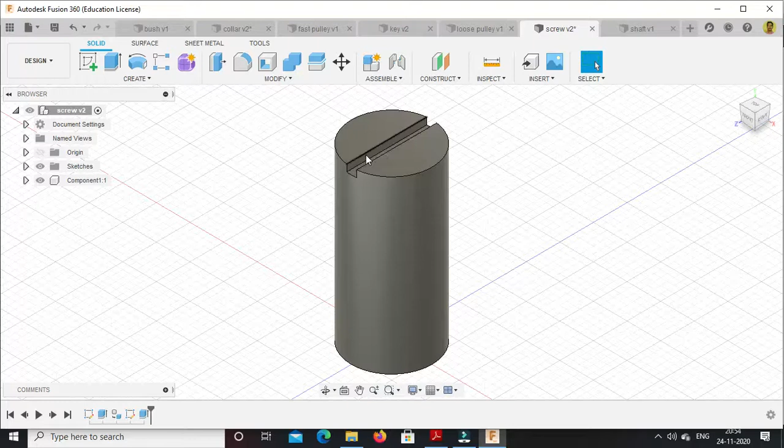Now I have made one more change for the collar screw. Whatever pin we were providing, I have cut one recess just like a set screw. For tightening purpose, I have drawn one rectangle and using the extrude cut option I have provided this cut.

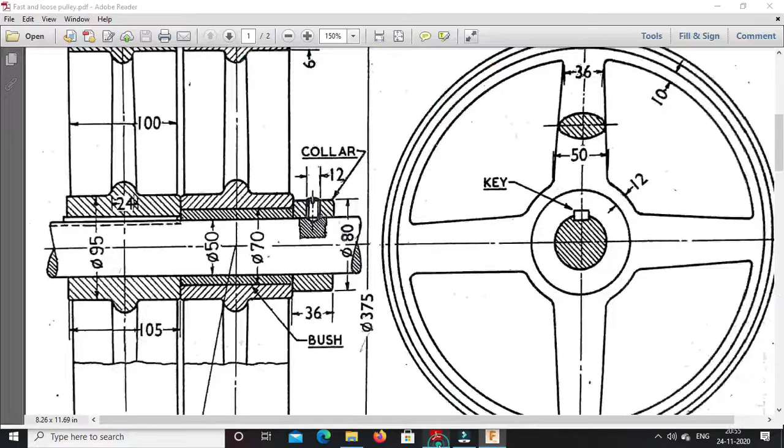Now we will provide a thread to it. For tightening purpose, in the earlier video I discussed that we would keep it as it is, but we will go as per the drawing. This screw is given as a threaded one, so we will provide threads to the screw. It is simple: just go here, create option, then go to the thread option, then select this face for which we want to provide a thread.

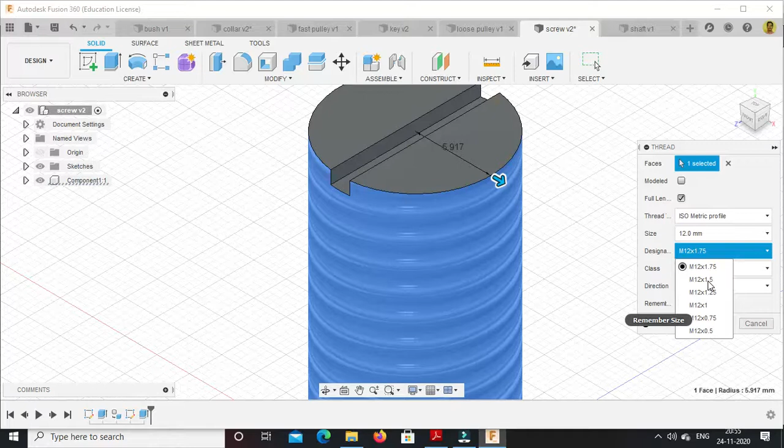ISO metric profile is there by default. If you want you can change it, but standard profile is ISO metric, so we will keep it as it is. We will select M12 and 1.5, where 12 is the diameter of the pin and 1.5 is the pitch. We will select M12 into 1.5 and also right hand thread, keep it as it is, and press OK. So this is nothing but the threading.

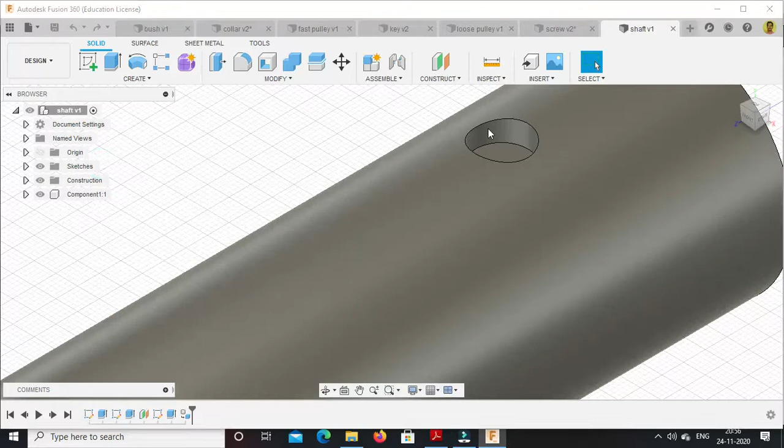Similar internal threading we will provide on the shaft. We have already cut this hole on the shaft, so we will provide internal threading to it. Just go to the thread option, select this internal part, and same as we provided on the screw: ISO metric profile and M12 into 1.5 is the pitch. Press OK.

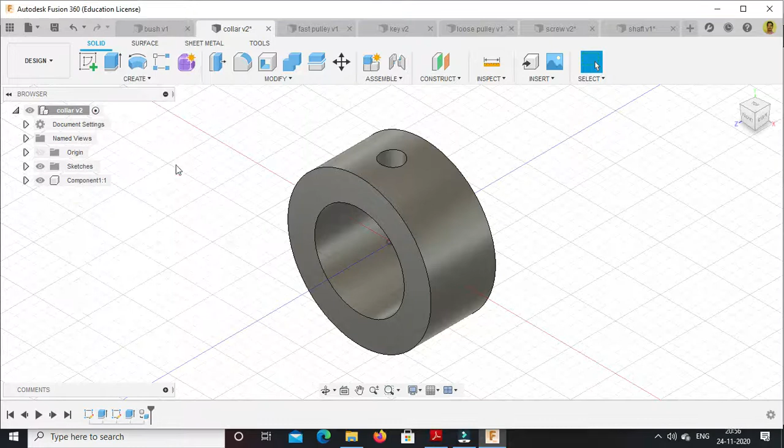Similarly for the collar also, because the screw is going to fit inside the collar and shaft, we will provide a thread, internal thread, to this collar also. M12 into 1.5. Press OK.

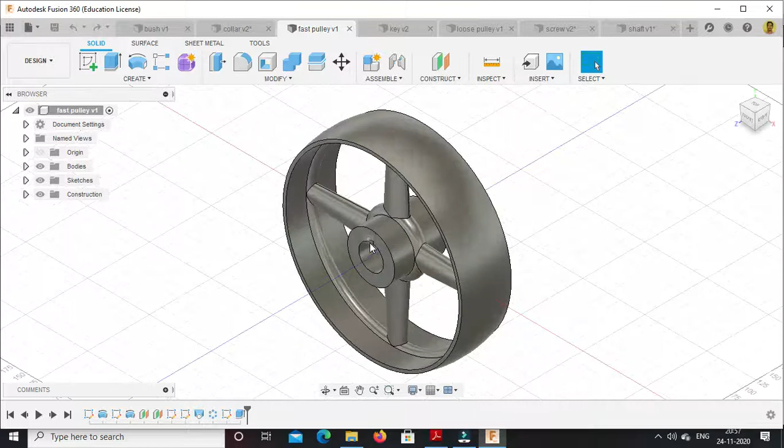So now these are all the parts that we have prepared on the Fusion 360 software for the fast and loose pulley. This is the shaft on which all the other components are going to mount. Then this fast pulley which is having a key, then this loose pulley, which has no keyway, only internal diameter of 70. Then the bush, then the collar, then this is the key, and this is the screw.

Now we will assemble all these components together. If you observe, this is the sectional view given for the assembly. This is the shaft over which the fast pulley will be. The left side pulley is the fast pulley because it is fitted to this shaft with the key, so it is called a fast pulley.

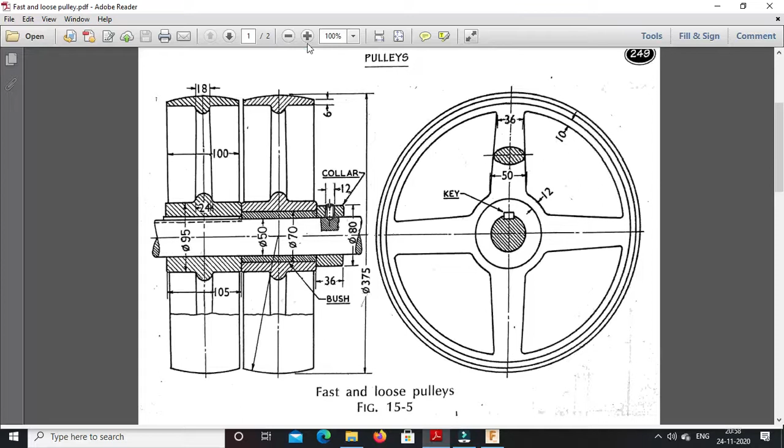So the shaft is there, to this shaft the key is attached, then with the help of that key the fast pulley is attached. The central portion which has dense hatching is the bush, fitted over that shaft. Now over that bush this loose pulley is there, so this second right side pulley is called the loose pulley. Then finally, to keep the loose pulley at its position, the collar is fitted, and to prevent the collar from axial movement along the length of the shaft, this screw is fitted commonly through the threading provided in the collar and shaft.

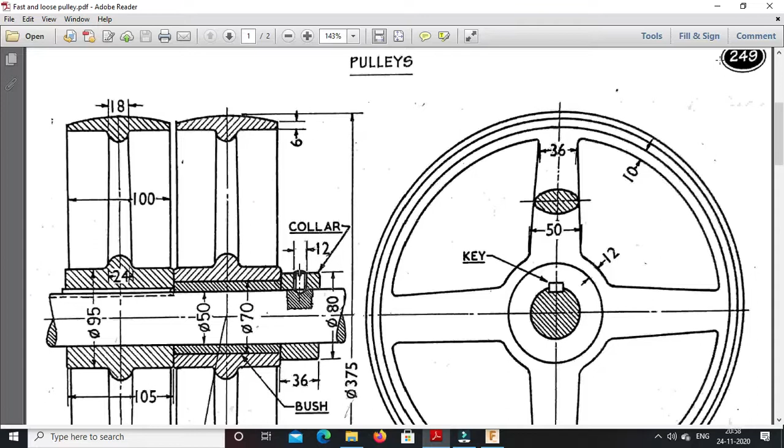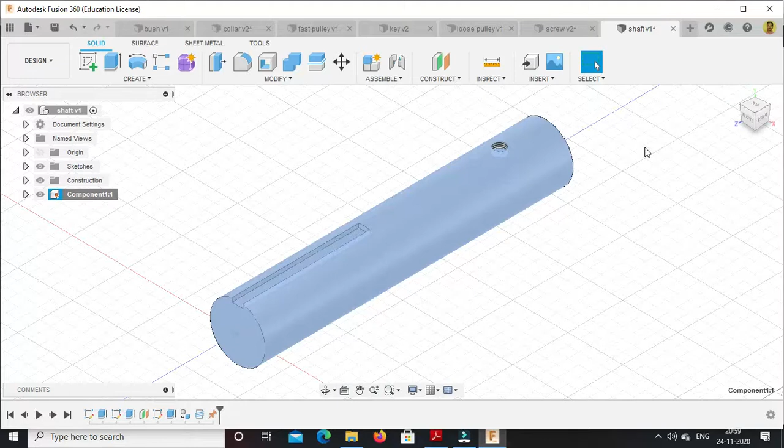So we will start with the assembly. As all the parts are mounted on the shaft, we will start the assembly with the help of the shaft. So this is a component; already I have converted all the bodies into components as per our requirement for the assembly purpose. Now first of all we will fix this, or make it ground, so it will not be able to move. So this shaft is now immovable.

Now we will fix first of all the key. Just go to the data panel. Key is there, just select this option, insert into current design.

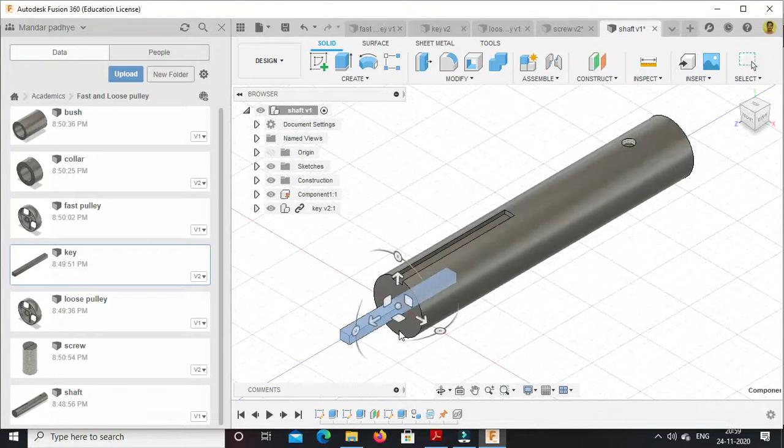It will take some time to load that key. Okay, we will drag it outside, press OK.

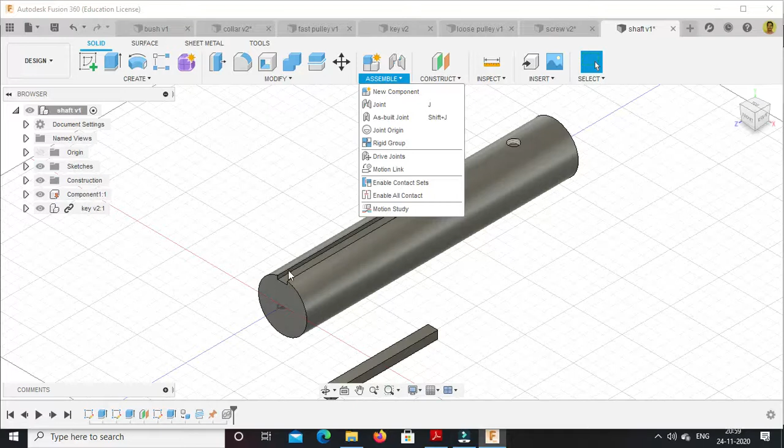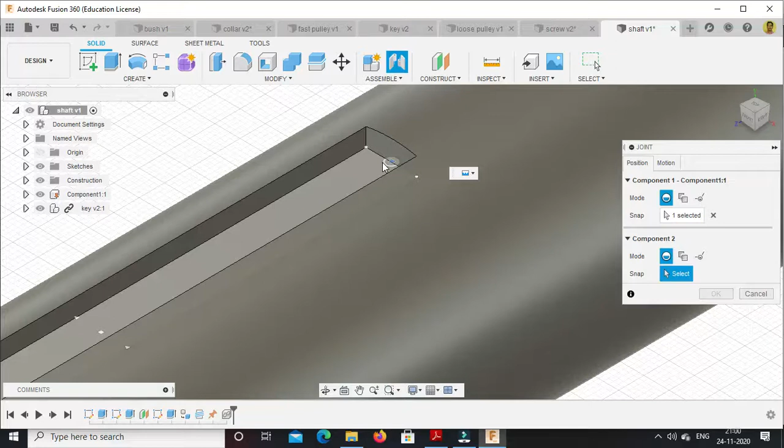Now we want to place this key over this keyway provided on the shaft. For that, go to the joint command. The bottom face of this key should be in contact with the bottom face of the keyway. Select this bottom face with its center, the circular portion, then select the same on the keyway—this is the bottom face—along with this end point. The key will get fitted, press OK.

As per our length, the keyway was 115 and the length of the key is 110, so that's why this 5mm is remaining. It is as per the expectation.

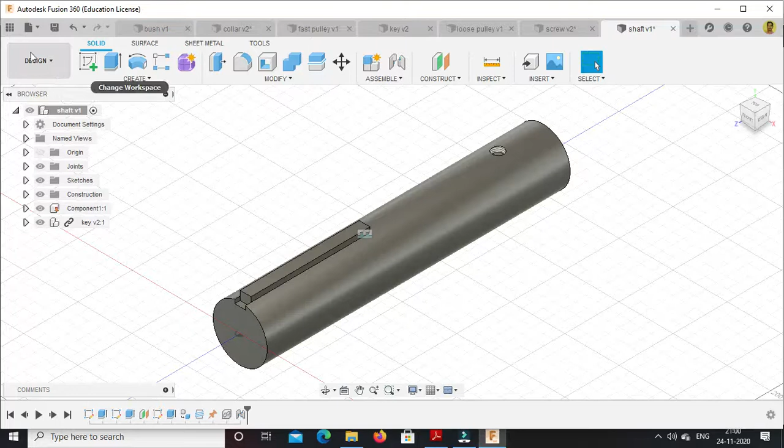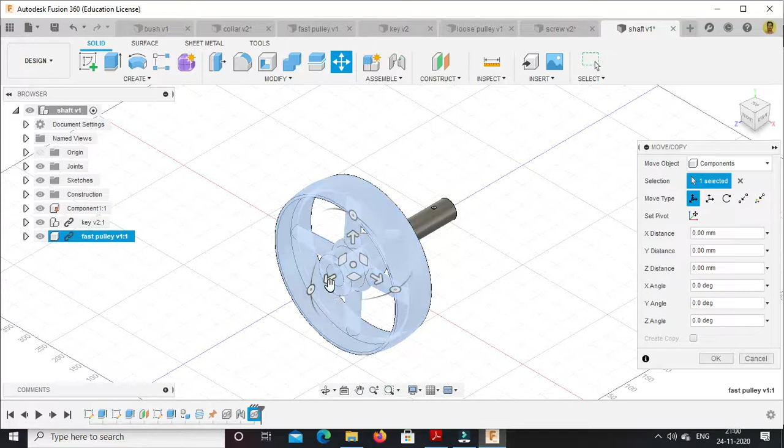Now we will fix the fast pulley. Go to the data panel again, pick up the fast pulley, insert into current design. Close this data panel, drag it further, press OK.

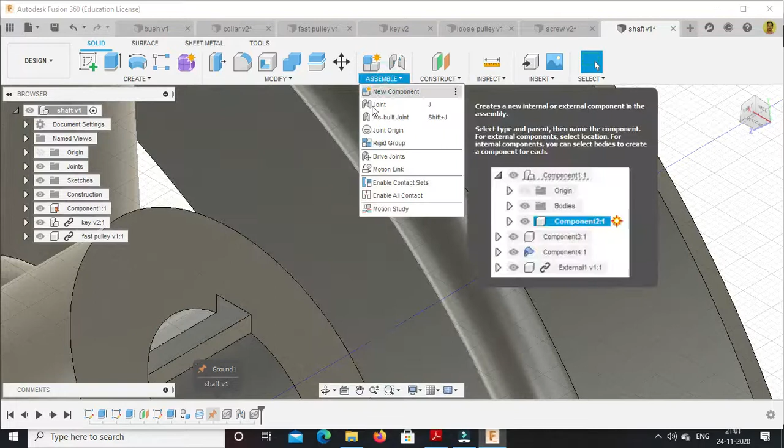Now with the help of this key we will fix this fast pulley on the shaft. We will select the keyway inside the fast pulley for the joint purpose. Go to assemble, use the joint option, select this keyway—this is the face of the keyway, along with this center point. So this circle is important.

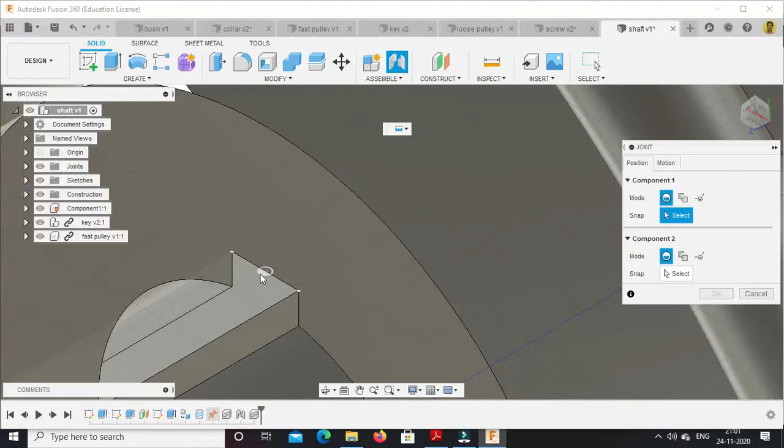Keep in mind that whenever we provide the joint command, this circle which is appearing near the arrow is very important, because the joint will take place with that point. If you select without it, it will not be appropriate. Select this point, then select the same on this key with its end point—again the circle is important.

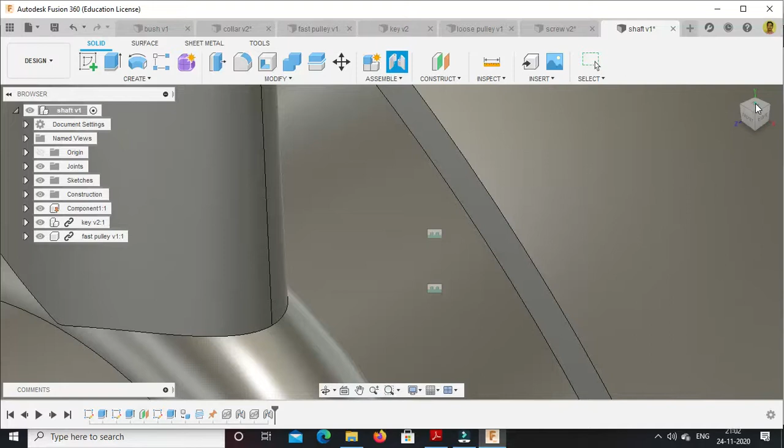Motion should be rigid because we don't want to move the fast pulley. Press OK. If you observe, this fast pulley is exactly fitted.

Now, next: we want to fit the loose pulley, but it will not fit directly on the shaft, so we want to first insert a bush on the shaft. Go to the data panel again, bring that bush into the current design, insert into current design.

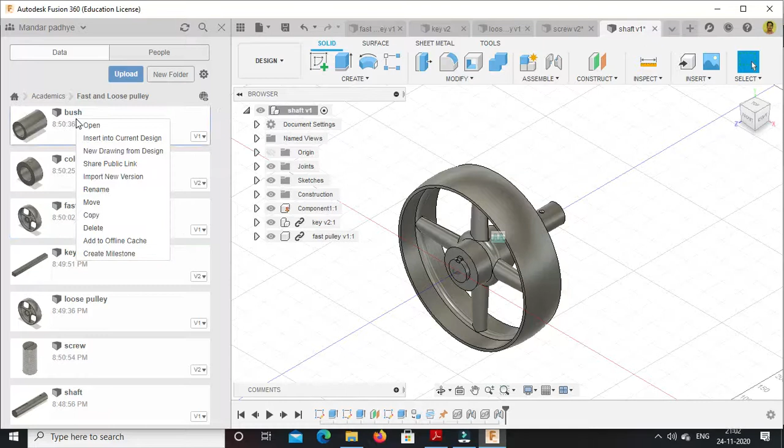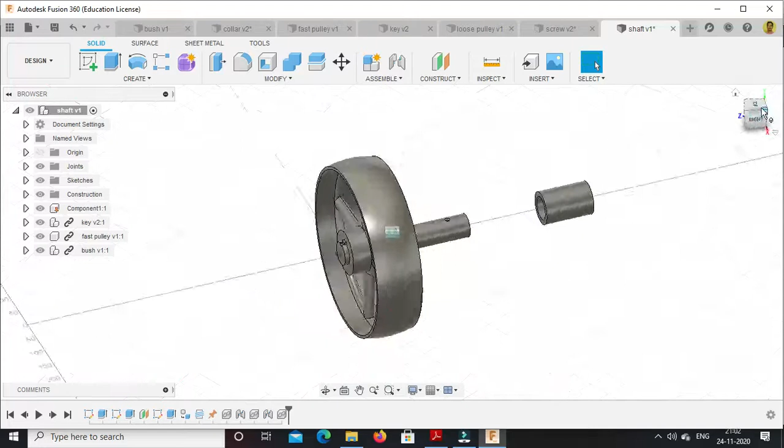We'll bring it backward, you can drag it anywhere. Press OK. Now we want to fix this bush on the shaft.

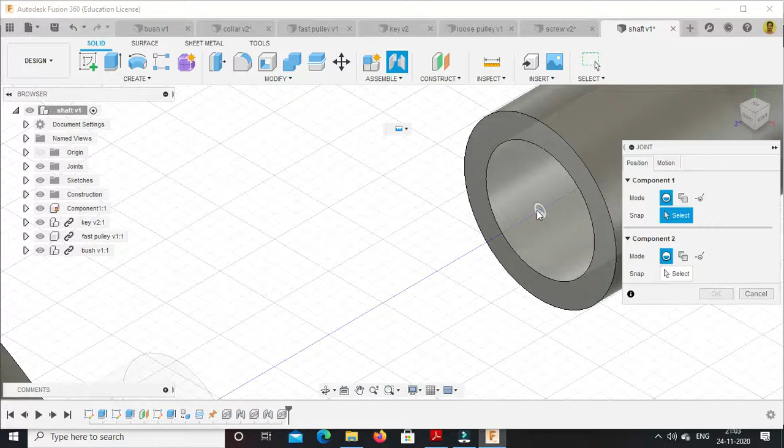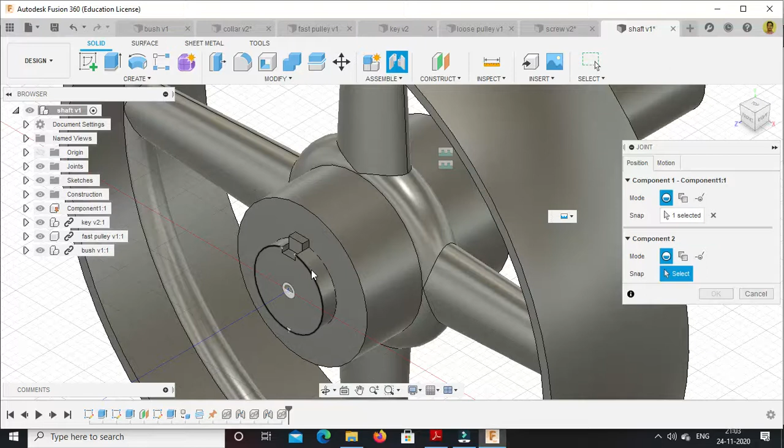For that purpose we will select this internal cylindrical surface. Go to the joint command, select this internal cylindrical surface along with this end point. The same thing we are going to select on the shaft. But now we will select this—press Ctrl for selecting the center. We have selected the left end point of the shaft, but we don't want to fix the bush over here.

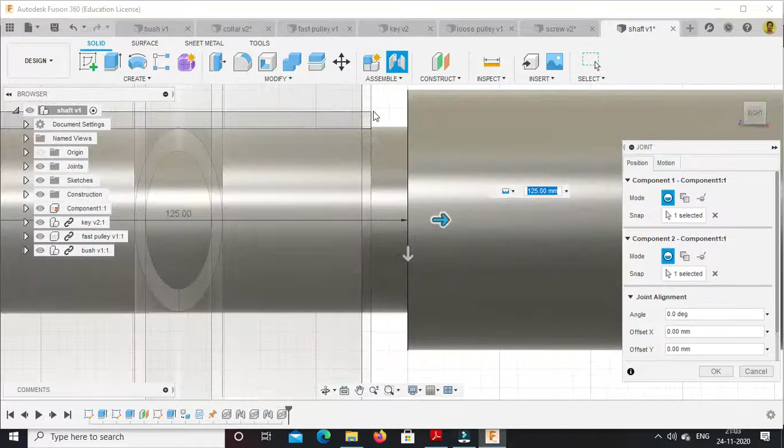So we will provide the offset. For that purpose, just drag this—this bush should get fitted or be in touch with the fast pulley. This distance is 115, if you remember the length of the keyway, so we will enter the distance as 115.

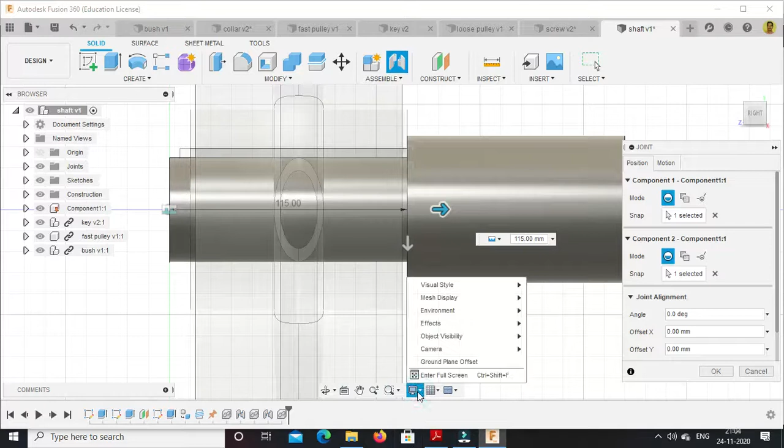You can check it using the visual style as wireframe. Now it is correct, so press OK. Again we will make the visual style wireframe with visible edges only.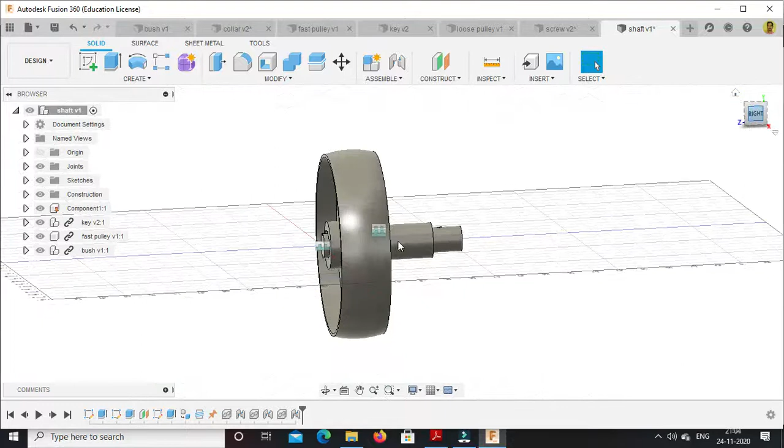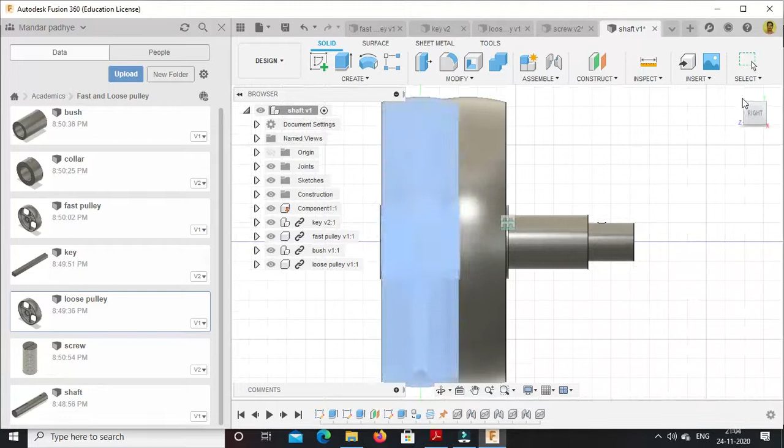Now we will fix the loose pulley on this bush. Select the loose pulley, insert into current design. Drag it as per the requirement—we will drag it to the back side. Press OK.

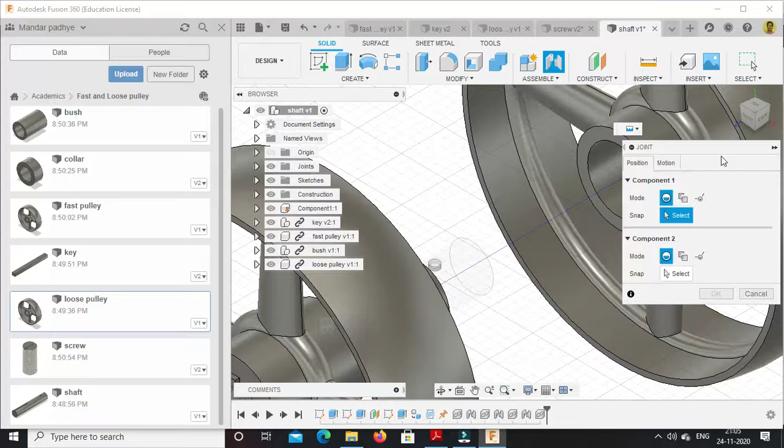Now we want to fix this loose pulley on the bush. Go to the joint command again. We will select this circular, inner circular portion of the bush. Again we will go to the joint command, press Ctrl for selecting the circle or center of the circle.

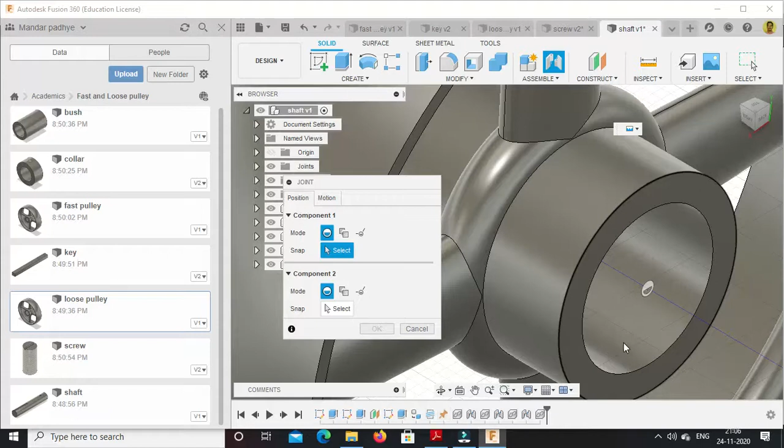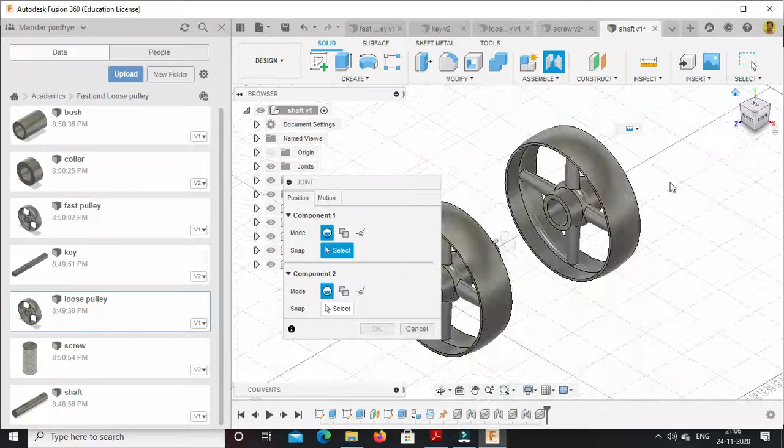I am not able to select it. Software is showing some problem. I will try to select that. I will cancel it. Again go to joint command. Okay, now I am able to select.

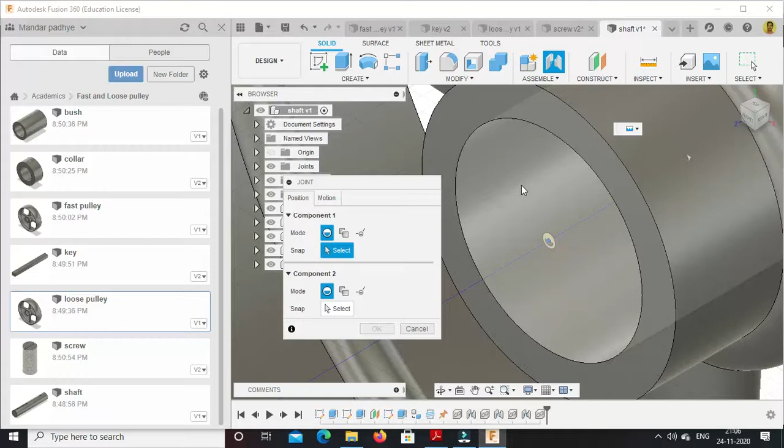Select this inner circular face with the front center. Now select the second point, so just select it on the bush. Okay, so this is the bush along with its center point, which is at the start of the bush.

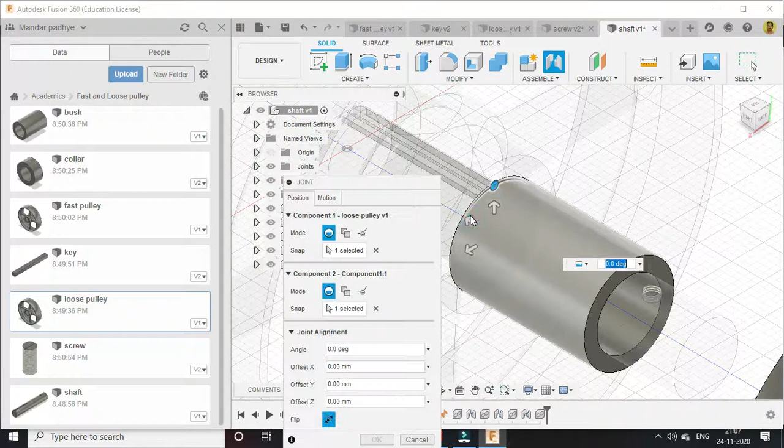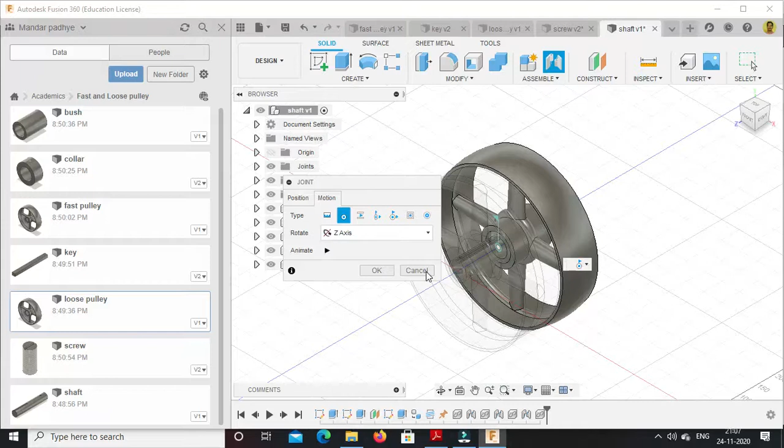Now we want this loose pulley to be able to rotate along with the bush, so it should be able to rotate. For that purpose we will select the motion type as revolute, so the pulley should be able to rotate freely over that bush. The rotation axis by default is the Z axis, so keep it as it is because we want to rotate that loose pulley along the same axis only. Press OK.

Now the next component that we want to assemble is the collar. Again go to data panel, select the collar, insert into current design, select this option.

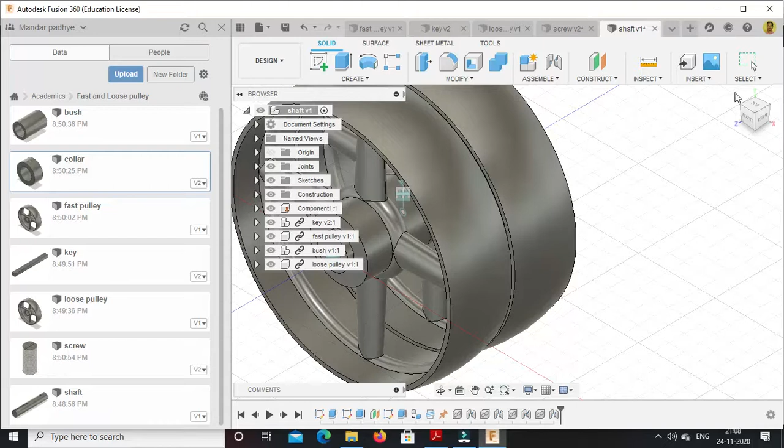Again we will drag it on the back side, press OK. Now this drilled hole should exactly match with the similarly drilled hole on the shaft.

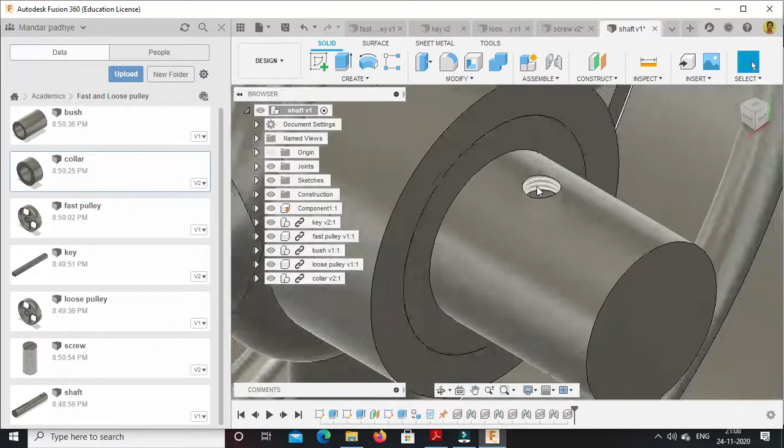So for assembly purpose we will make use of it. Assemble, again go to joint command. So this collar...

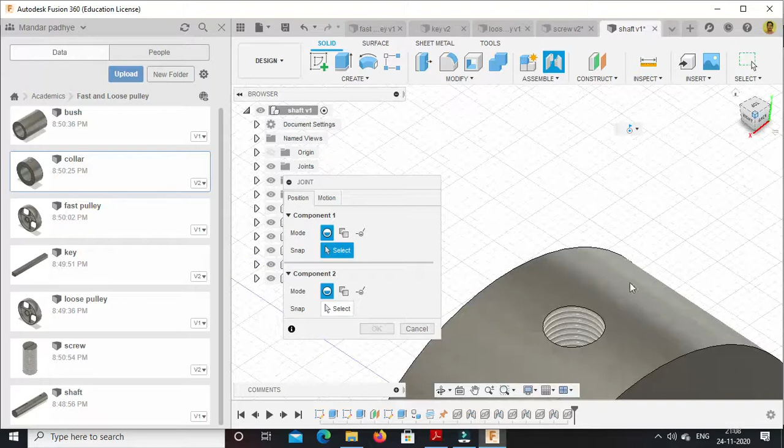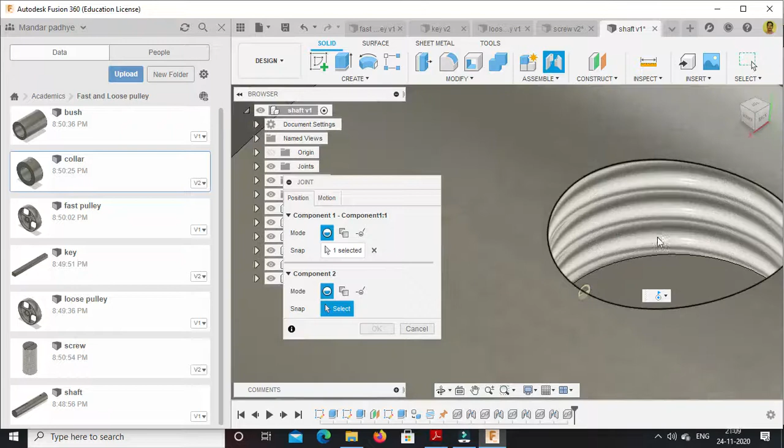Will select the bottom center of the hole, and same for the upper center of the drilled hole along with the cylindrical or circular surface. So this inner circular surface with the upper center.

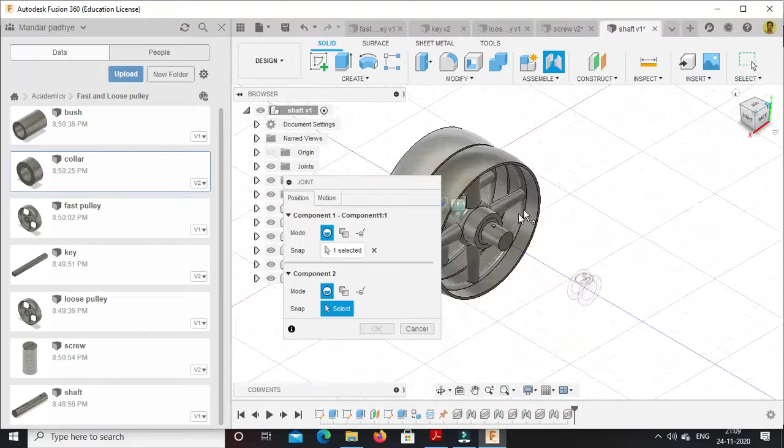We have selected wrong, let's select again. Okay, so now it is correctly selected. But we don't want rotational motion, we want to fix it. So again change the type of motion to fix and press OK.

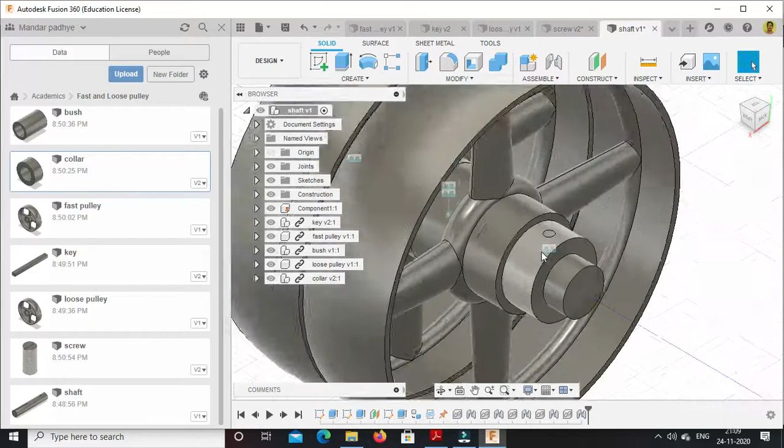And now the final component, we want to insert the screw inside this threaded hole which is common in the shaft and collar. So first insert this screw into current design.

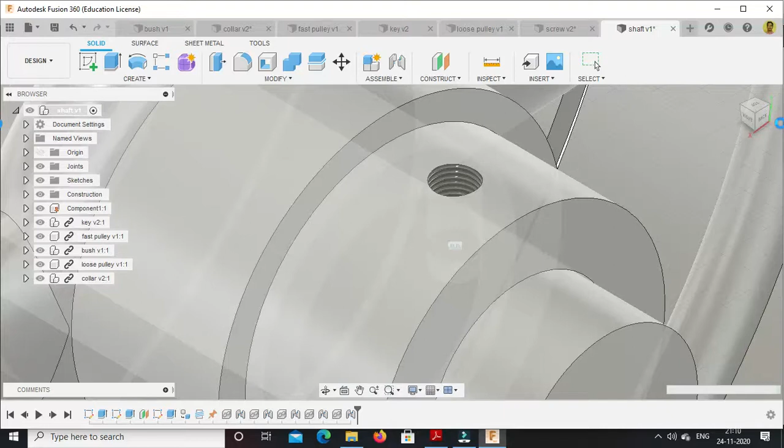So again we will drag it on the back side, press OK. Now we want this screw to be placed inside this threaded hole.

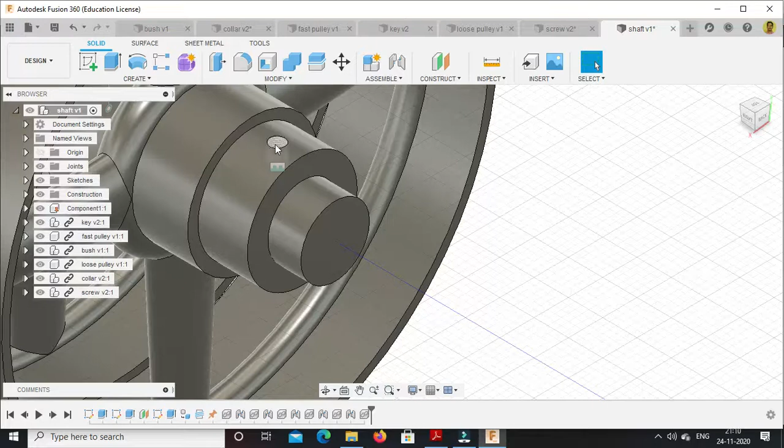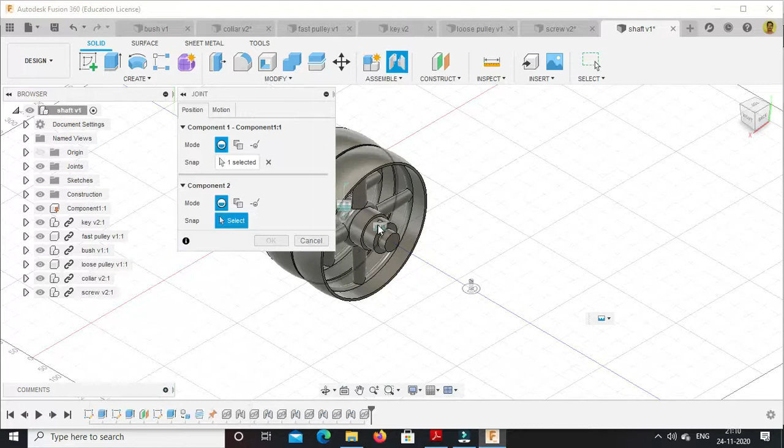So again go to joint command, select this outer surface of the screw along with the bottom center. And it should be in contact with the same bottom surface of the hole which is in the shaft. Remember that it should be in the shaft.

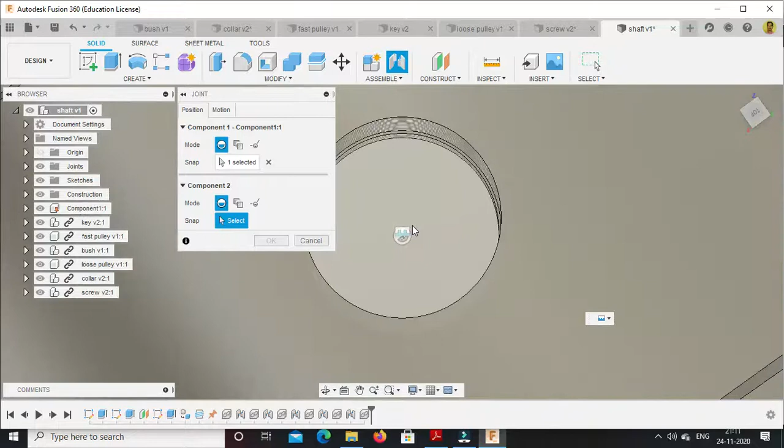So we have selected the bottom face. Now we will check it again with the help of the wireframe model. Just go to visual style as wireframe.

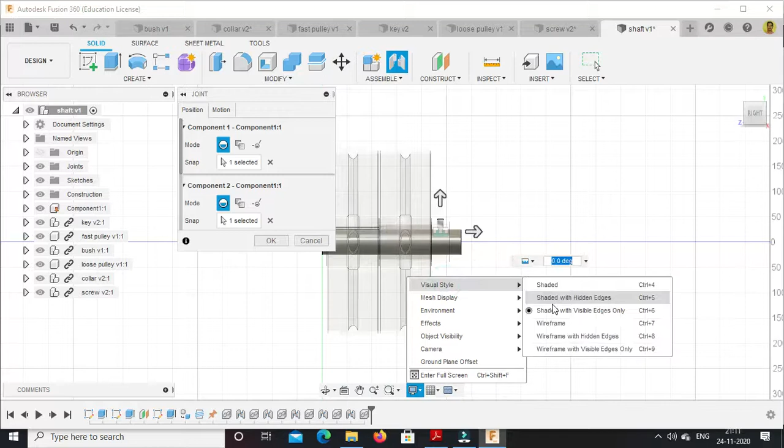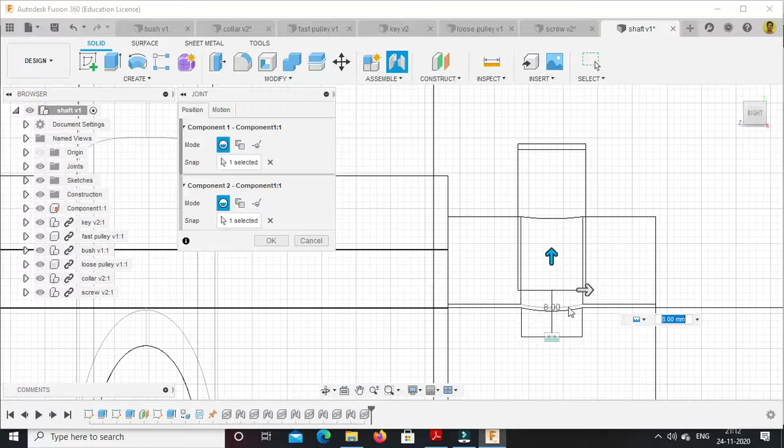So if you observe, if I drag this screw, it should be placed. So this is nothing but the end point of the hole that we have drilled in the shaft, and this is the interface between the shaft and the collar. So that screw should be exactly in contact with this bottom face.

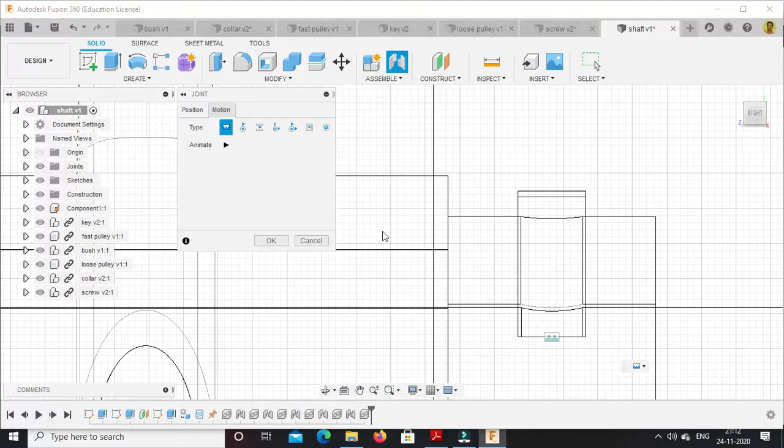That we have corrected initially, so we have placed the screw correctly. And select the motion type as rigid only, because we don't want to move that screw, since it is tightly fitted with the help of thread. So we want the joint between that screw and threaded portion to be rigid. Press OK and change the visual style to shaded with visible edges.

Now if you look at this assembly, this is the complete assembly. We have completed it, all the components are joined together now.

Now if you want to rotate the fast pulley, it is not able to rotate. Why? Because we have grounded the shaft and that fast pulley is rigidly connected to this shaft. But if we try to rotate this loose pulley, we are able to rotate it.

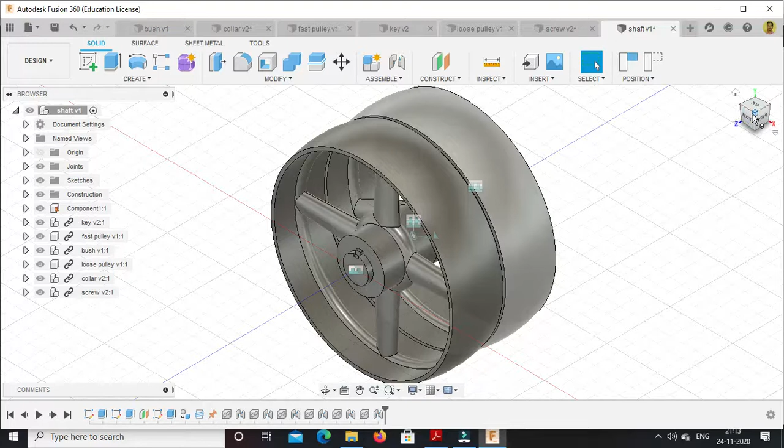If you observe from this angle, this loose pulley we can rotate, meaning it is not rigidly connected with the shaft. That is the meaning of the loose pulley. I have already explained for what purpose this fast and loose pulley arrangement is used.

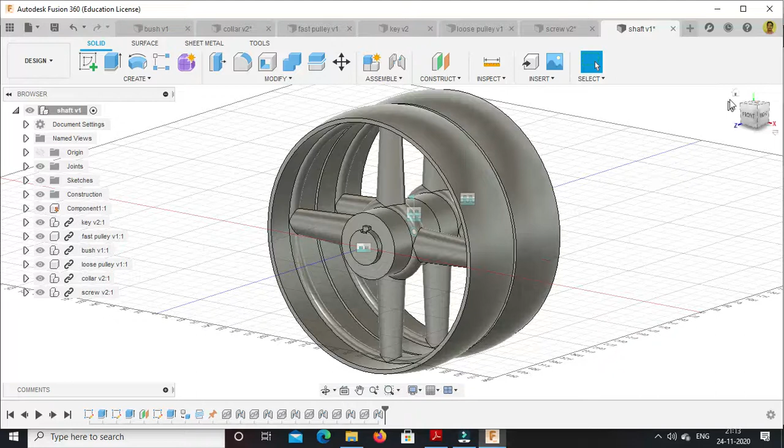So with this we have completed the assembly. If we rotate it, that loose pulley will come back to its original position, but it is able to rotate freely without rotating the shaft. That's why it is called a loose pulley. So this is how the fast and loose pulley assembly will look.

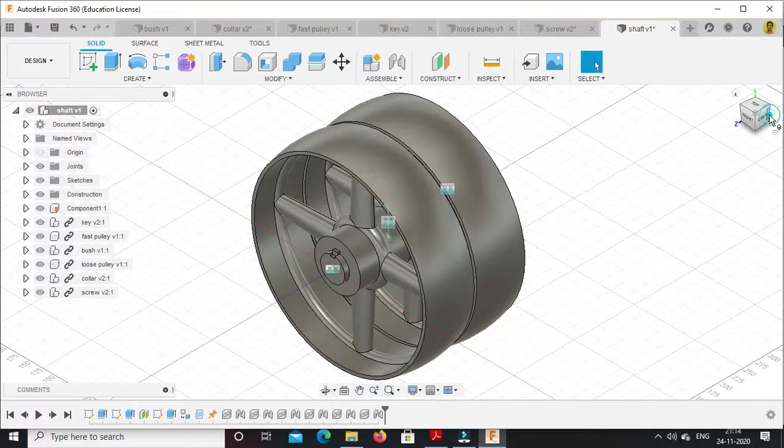This is the collar and screw. So with this we have completed the assembly. Thank you.